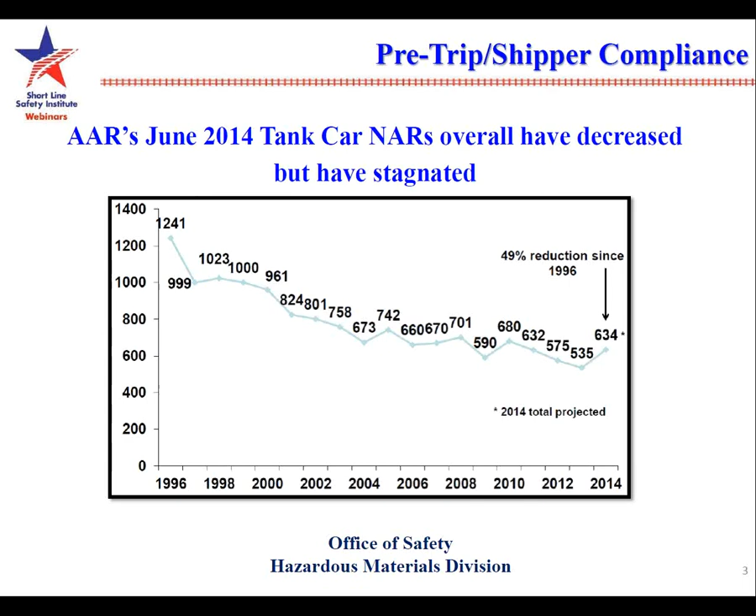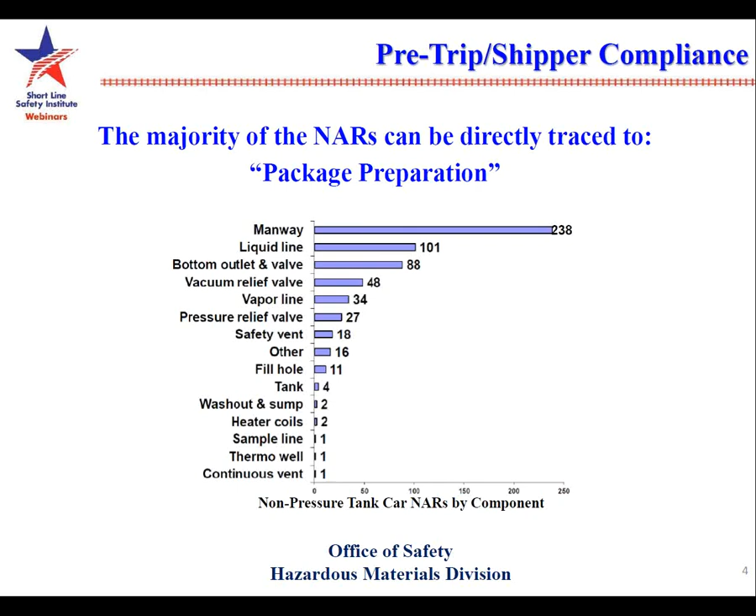Around the Manway area, in the causes, 120 of those causes at the Manway were loose bolts, 60 were gasket deterioration, 25 gaskets missing, 19 gaskets misaligned, 3 gaskets the wrong size, and 3 had new breaks in the eye bolts connecting the Manway cover to the nozzle.

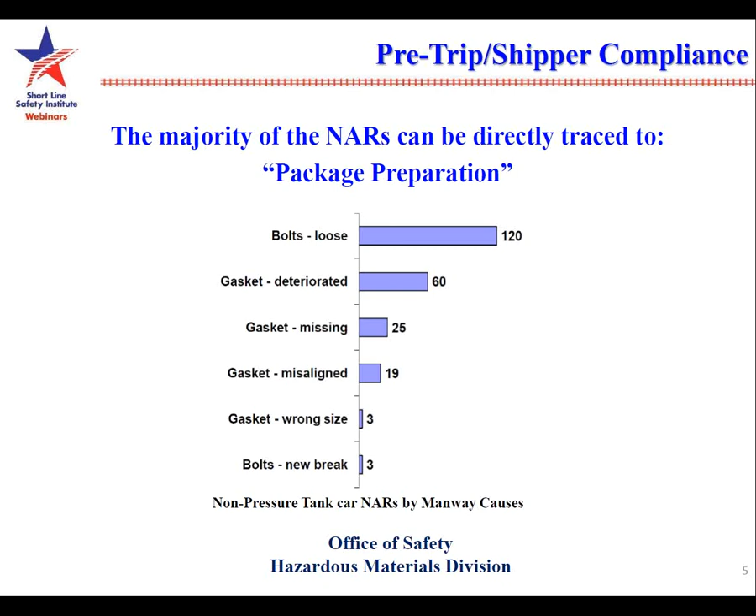Our approach to reducing these NARs is going into the shippers with our inspectors, looking at 3 different areas that directly affect package preparation and reducing NARs.

First of all, it's function-specific training. All shippers are required to provide training to all their employees preparing a tank car for transportation, and they have to come up with a training program that will not allow leaks in transportation. So we look at their specific training.

We also look at their standard operating procedures, or SOPs, and their owner equipment manufacturer OEM recommendations. Now, the SOPs and OEMs are not required by regulation, although when we find that they're not following a manufacturer's recommendation and they get a leak in transportation, we're going to ask for the maximum penalty because they did not follow a guideline or industry standard that was out there to help ensure that package is secured according to the item they're using, such as a gasket.

Now finally, after reviewing those training items and their SOPs and OEMs, we go out to the loading racks where the operators are loading the cars and observe them to see if they're following their training procedures or any SOPs or OEMs.

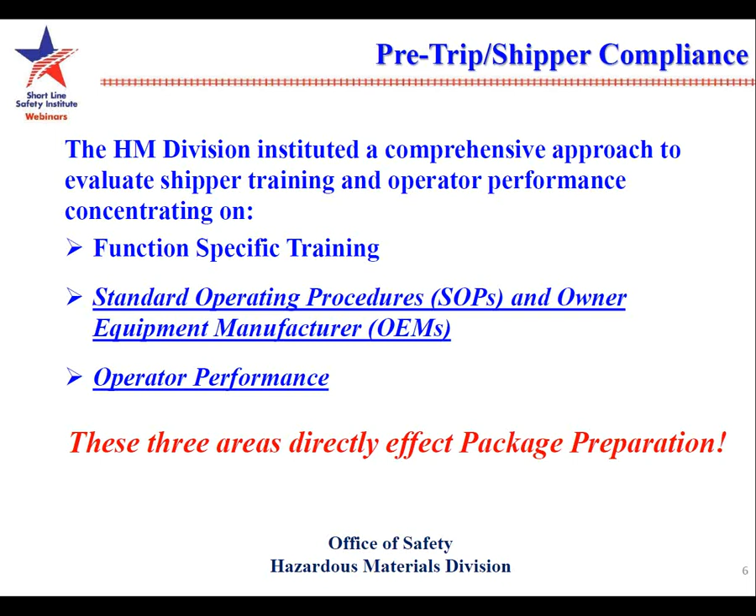So as I said, what we do is first go over the training inside the office, look at their SOPs and OEMs, and finally go out to the loading racks and watch how they prepare a tank car for transportation.

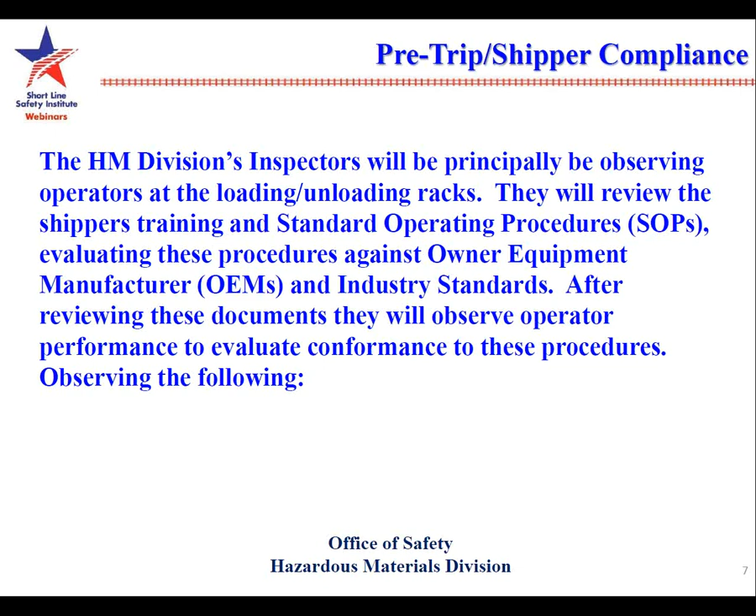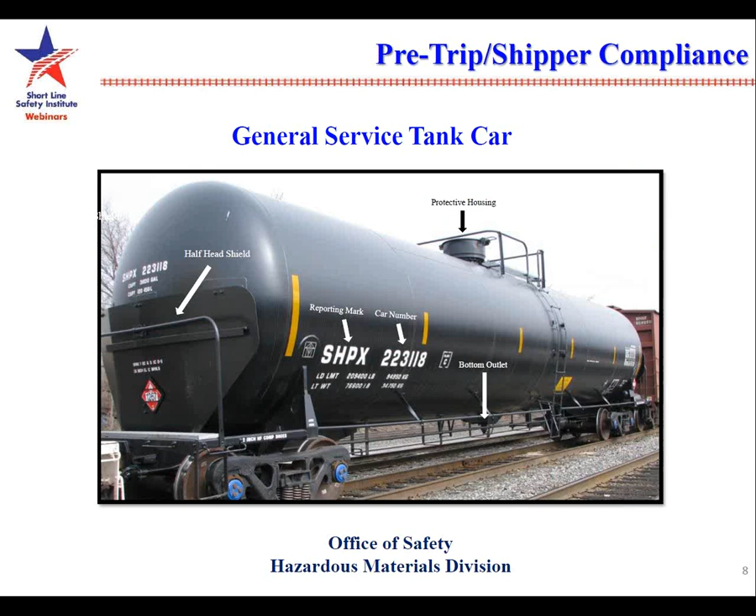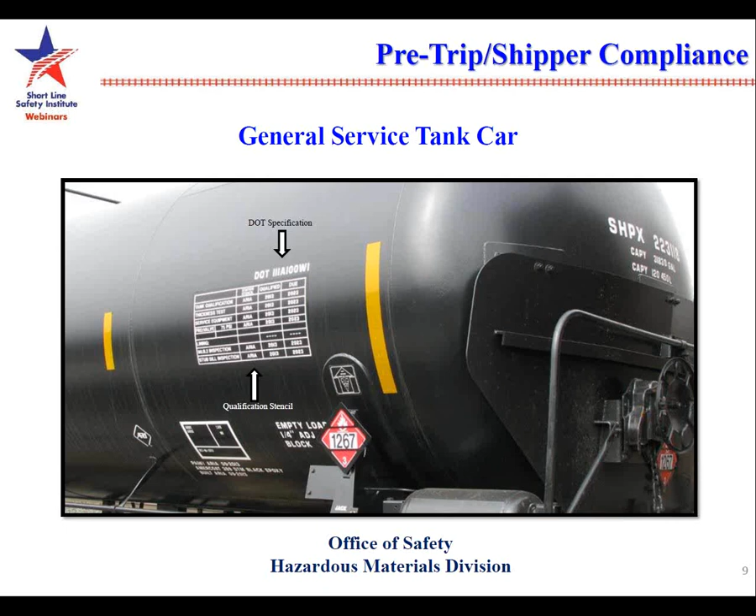The pressure relief device is designed so that if you build up too much internal pressure, rather than split a car, it'll vent the product to stop the car from bursting.

The vapor line is used when you're loading a car. As you're putting product in, you have to be able to vent the car because you're displacing the air, unless you're loading through a manway cover. But if you're loading through the service equipment, you have the vapor line and the liquid line. The liquid line, of course, is where you hook up your loading line and start loading your car.

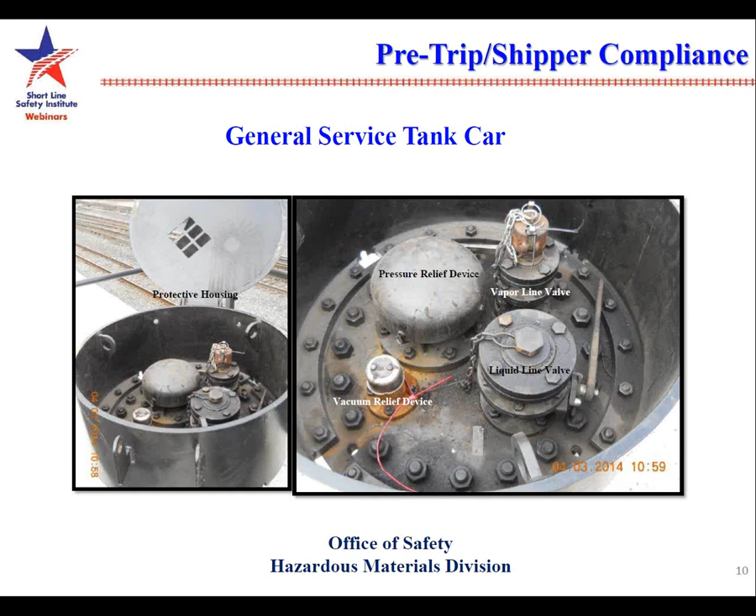The vacuum relief device is designed for the unloading side of the house. After the car is loaded, it goes to a customer for unloading. If the unloader doesn't open a vapor line valve to allow in air as the car is unloaded, the device is designed to suck air in to stop a car from collapsing. And they'll collapse like a tin can if you don't have air going into your car as you're unloading it.

At the bottom of the car, this is the bottom outlet valve, and at the top there you see the bottom outlet valve handle, which actuates your valve to open or close it. At the bottom of the configuration, you'll see the bottom outlet cap, which screws onto the nozzle off the valve, and at the bottom of that is a bottom outlet valve cap's plug.

These are items that are found leaking in transportation quite often. If you remember back to the earlier slide, 88% of the NARs were from the bottom outlet area. Generally, it's from the cap and a bad seal.

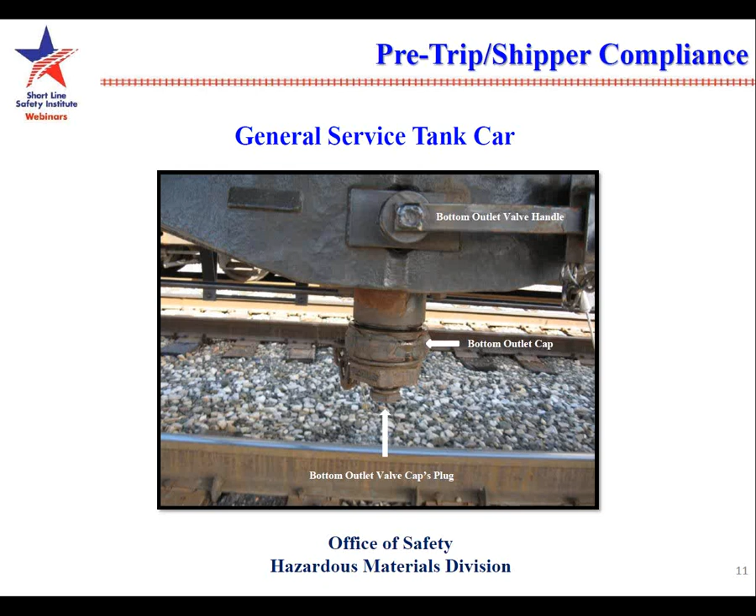Prior to loading a car at a loading rack, the shippers should be doing an inspection of the car and all the service equipment. As we identified, you look at the test dates on the service equipment, make sure it's the right car. The other items you look at are the vacuum relief valve.

Is the valve venting? Is it in proper condition? Has it been disabled? We found that people, when they think it's not working, will get duct tape, wrap it around, and prevent the valve from hissing. You're disabling the function of that car and could cause a collapse.

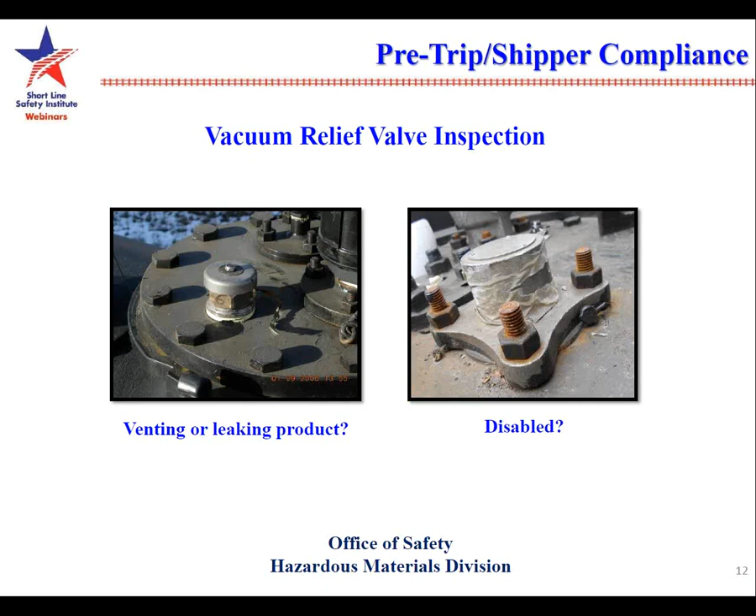The other things we're looking at are the vapor and liquid lines, to see if the caps, the plugs are tight, the valves are closed. The picture on the left here shows you the old bread box cover for the liquid and vapor lines. The loader has to look at these valves to make sure they're in operating condition before loading a car.

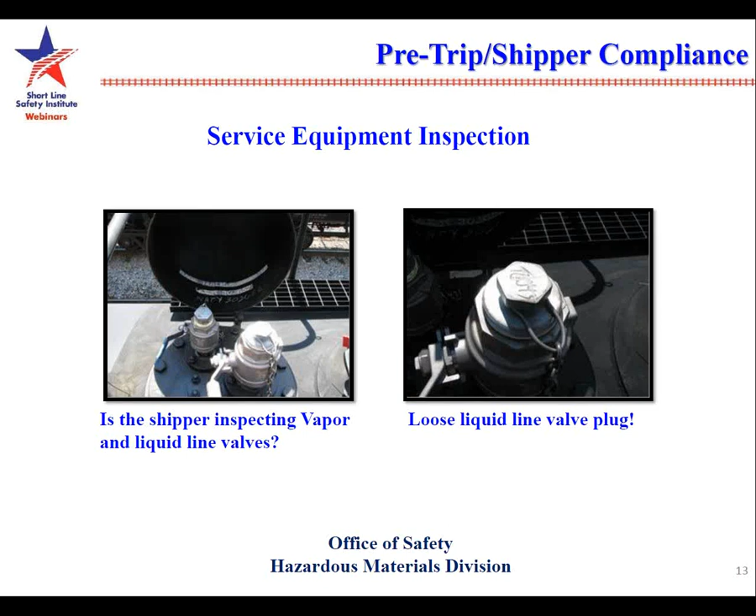Another thing they'll look at, if they're loading through the manway cover, is they'll open the cover and check the gasket. In this case, that gasket is torn. The cause for this was generally over-torquing. We'll get into that in a little bit.

Most of the time it's caused by pneumatic impact wrenches. Prior to the last 10 years, most of the industry was using pipe wrenches to torque down the swing bolts or the eye bolts on a manway cover. In the last particularly 10 years, 5 years especially, they're going to impact wrenches. It speeds up the operation, but we'll get into the problems with that in a few slides here.

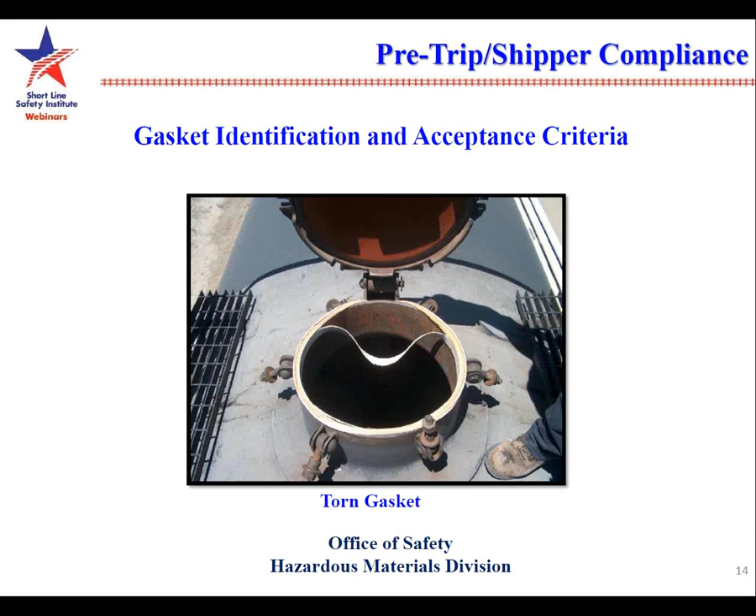One of the things they're inspecting for is that gasket. This type of gasket is sealed instead of on the nozzle of the manway, it's right in the manway cover. This is a hard gasket, and it has a compression set. On the right, you'll see that there's a little groove inside that gasket. That's not supposed to be there. It's lost its elasticity and will not give you a good seal.

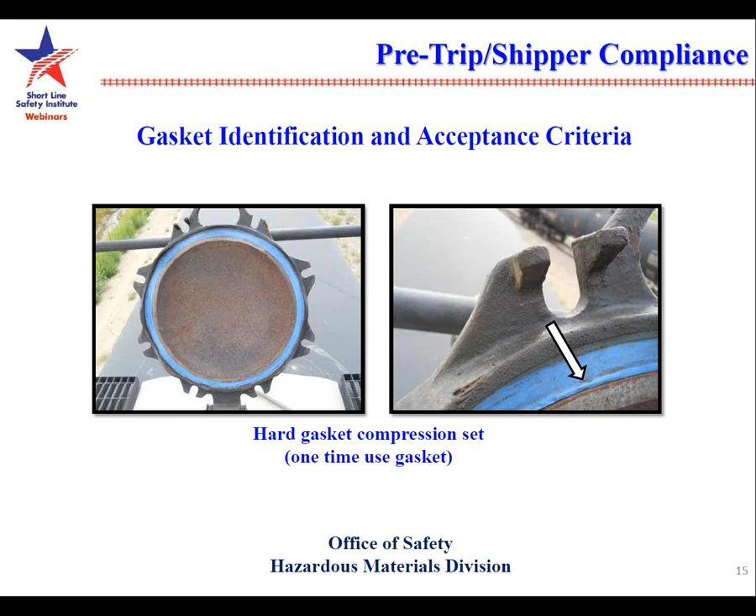If you look up the use for most gaskets, not all, but most are a one-time use gasket. In order to save money, we'll find that shippers will reuse gaskets over and over, and this is a result of reusing a gasket. You get a permanent compression set, and then when you go to torque your manway cover down, it's not going to seal.

This gasket's a rubber or elastomeric gasket. It is a multi-use gasket, but over time it will get degradation. As you can see there, it's starting to rot away, either from chemical degradation or from the age of the gasket itself.

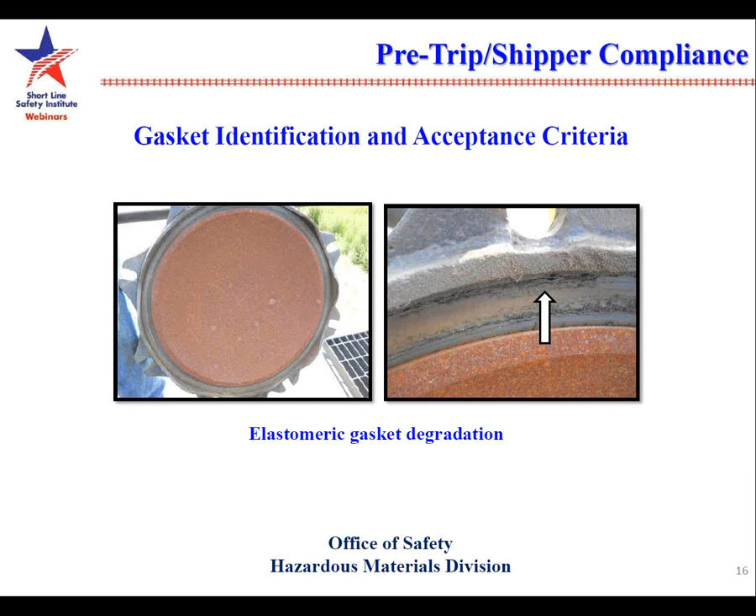Prior to loading a car, the loaders at the rack have to identify if there's any heel in the car, any commodity left at the bottom that wasn't emptied from the last shipment. This person here is taking a mechanical estimate of the heel in the car. They'll stick a rod down, come up, and know how much commodity is in the car, then figure that out for what's called an outage.

When you load a tank car, federal regulation requires anywhere from a 1 to 5% outage depending on commodity. So the heel that's in there has to be calculated into how much you put in a car, so you have that outage at the end.

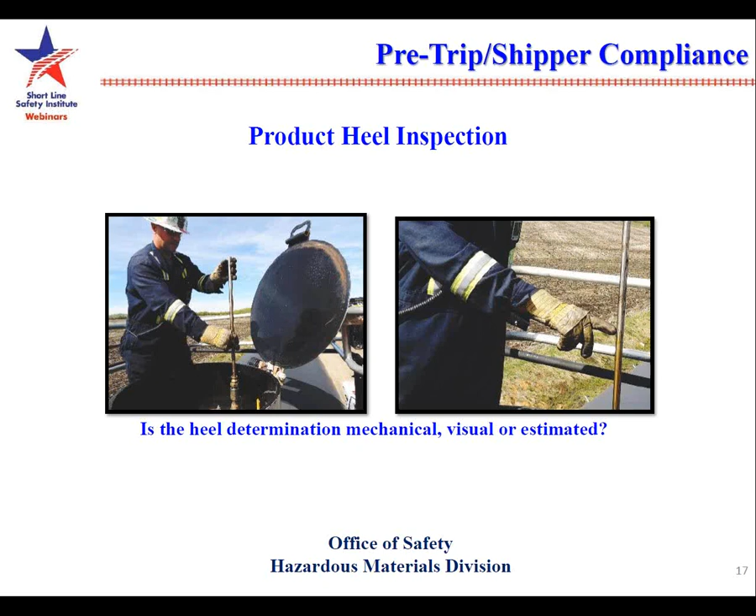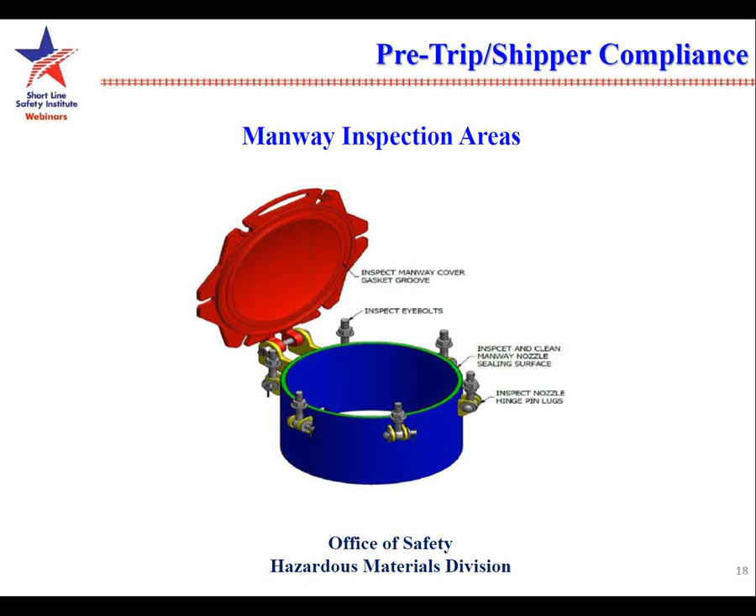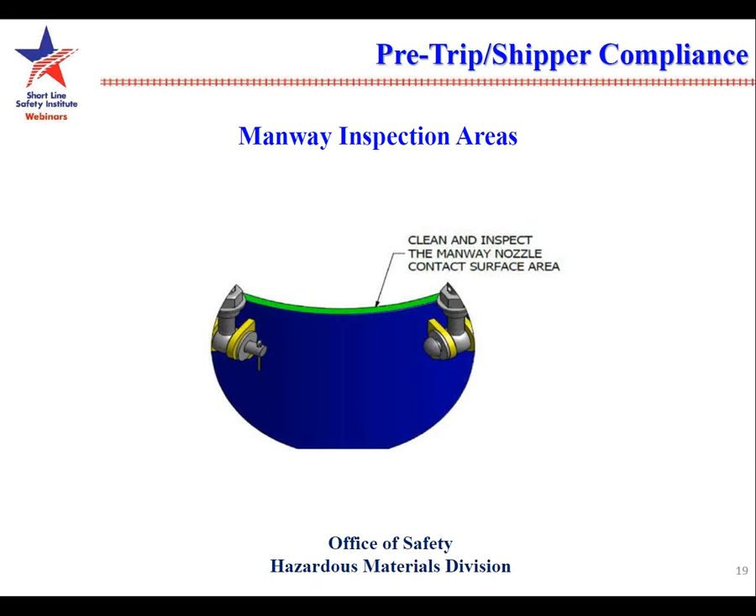Here it's showing an inspection of the manway gasket, the pipe that goes into the manway cover itself. You go around, you feel and observe it with your eyes and also your fingers, feeling around to make sure there's no compression set in it.

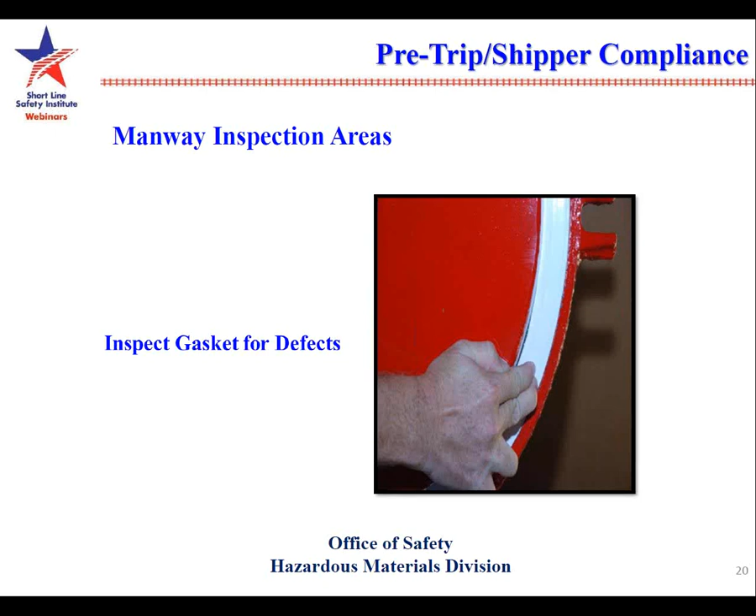Another critical part of sealing a car is your swing bolt. When you're sealing up the car, you have to make sure the swing bolt is perpendicular to the manway cover, and the eye bolts don't have any damage or wear. We'll show you some pictures of some wear. Like I said, they have to be perpendicular before fastening down.

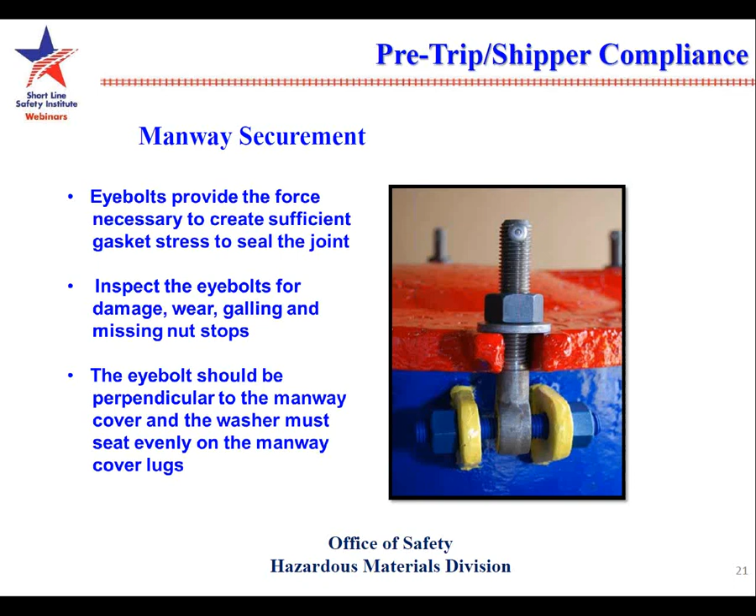Another very important and critical part of closing a car is lubrication. We find many shippers are not using lubrication, and what happens is you end up galling these swing bolts or eye bolts on the car. So not only do the threads of your swing bolts have to be lubricated, but as you see here, the face of the washer is very critical in the sealing of a manway cover.

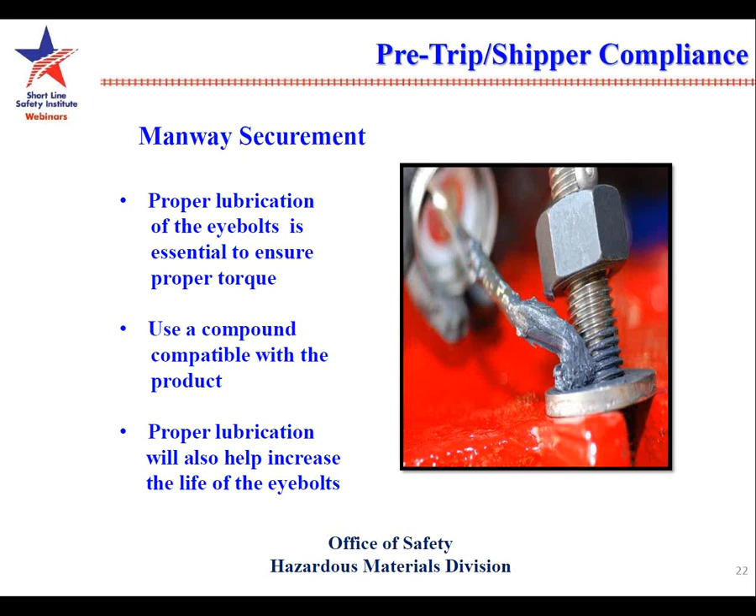Most OEMs or equipment manufacturers recommend the use of a torque wrench, so you are precise on how you're sealing your car. It's not a regulation, it's just a recommendation.

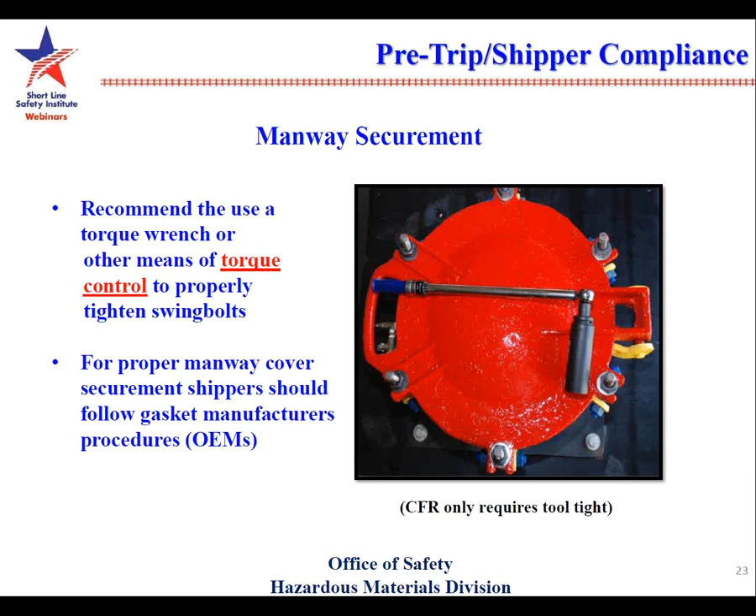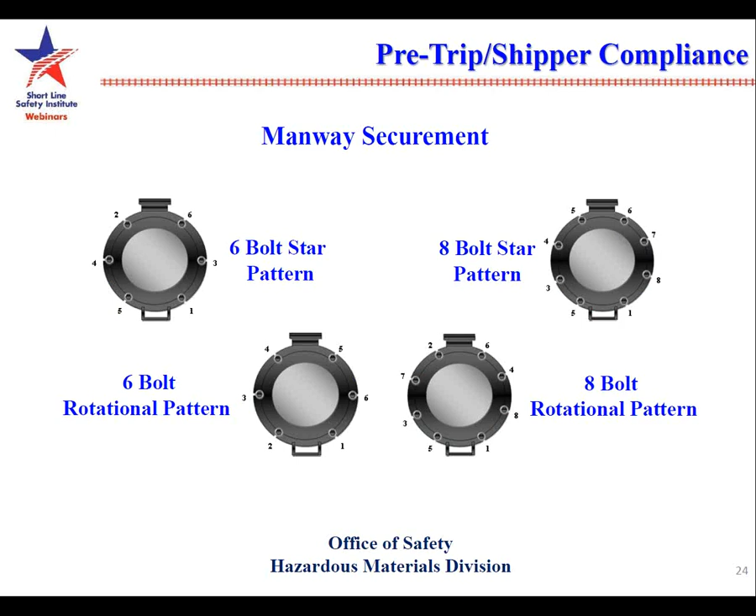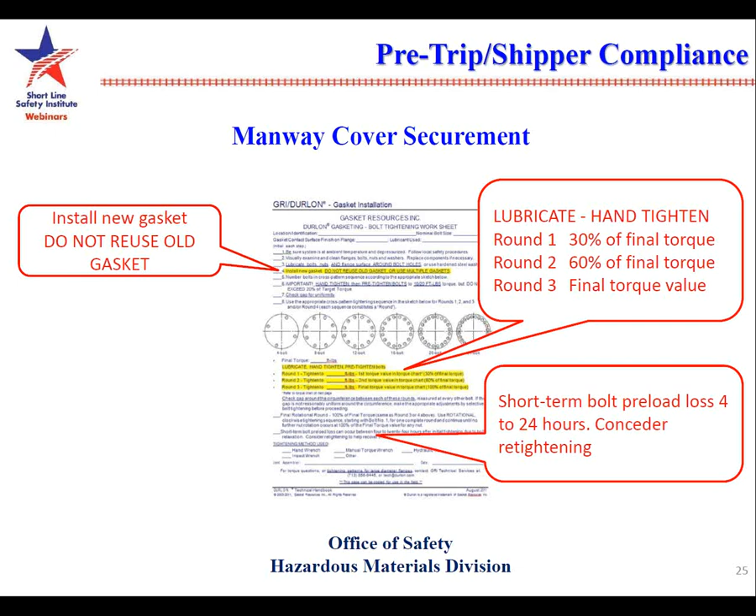Next, it shows you the lubrication we went over that's essential to sealing a manway cover, done in 3 equal increments, with 100% being the final torque. Your first round is 30%, your second round is 60%, and then your final torque at 100%. You let that sit for 24 hours. Go back and retighten it with this sequence, or you could have a leak path in your nozzle area.

These slides are looking at Manway swing bolts and the defect. What we're illustrating here, every Manway gasket, a Manway cover, has a safety eye bolt, at least one, most have two. What that's designed for: when the car is under load, it will build up pressure in transportation. And when it's going to your consignee to be unloaded, they'll loosen the swing bolts, flip them off to the side, but there's one or two safety eye bolts, and if a safety eye bolt's not in place and they loosen that, that Manway lid will fly off. Even under 5 to 10 pound pressure, it'll fly off like a rocket, and it could really hurt somebody or kill them.

So there's a safety swing bolt that has to be there. This is an illustration where that safety swing bolt is not in place.

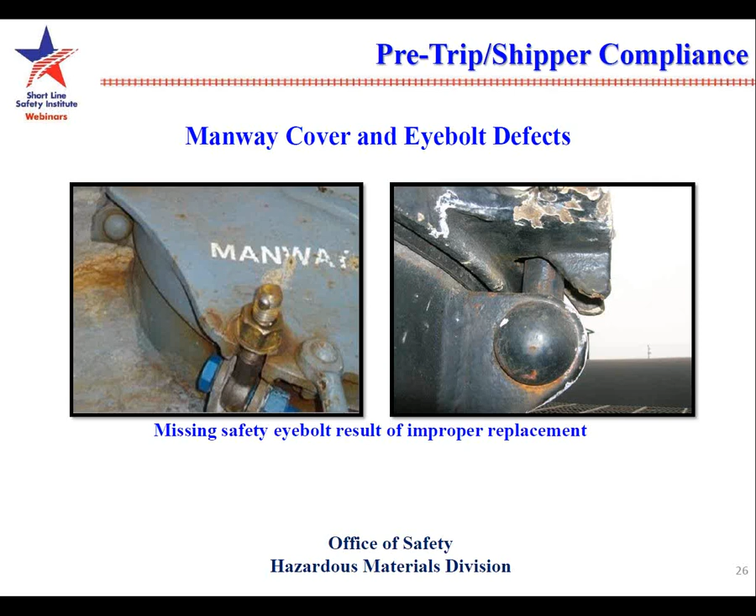This is a safety swing bolt, and you can see the little pin that goes behind the little lug that comes down on the Manway cover. Off to the right, you'll see a safety swing bolt illustrated, a new one. So when that's loosened, there's no way that swing bolt can fly out and the Manway cover come up until that pressure is relieved.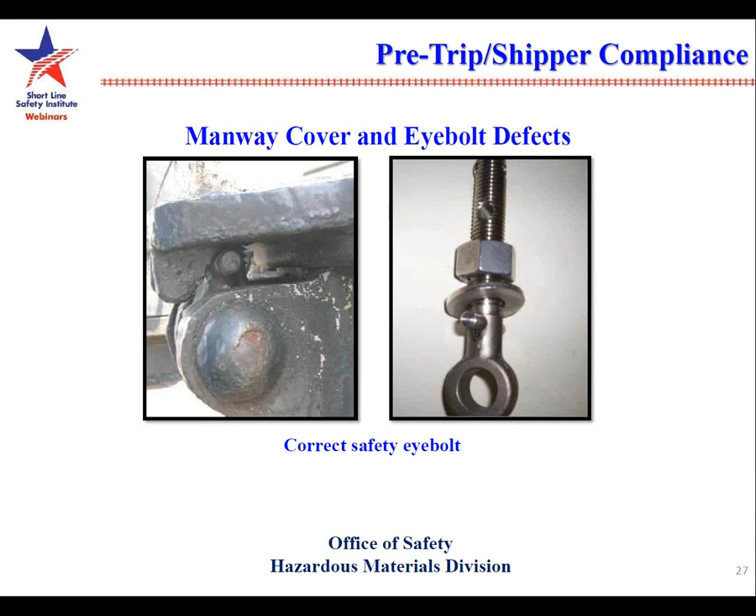If you don't lubricate, and particularly with the use of pneumatic impact wrenches, it heats the metal an awful lot in transportation. Prior to using impact wrenches, you didn't see this as much. 15 to 20 years ago, you didn't have a lot of this. Now we're seeing a tremendous amount of galled bolts.

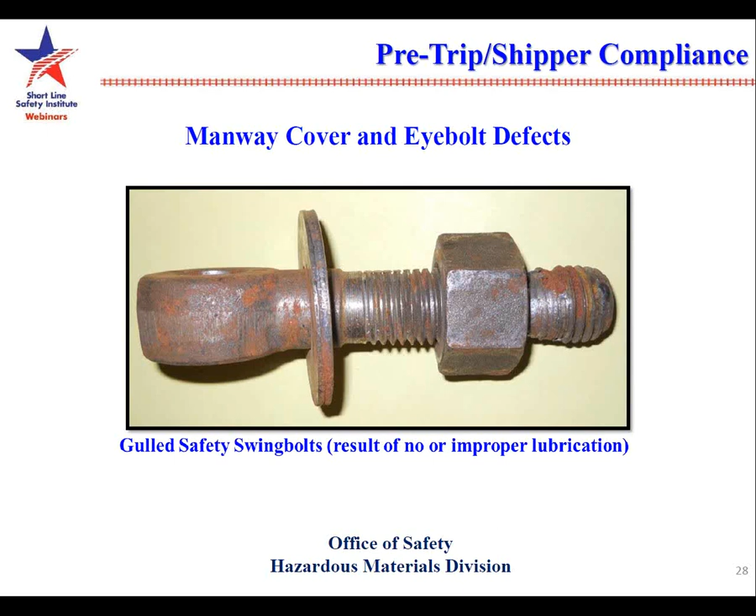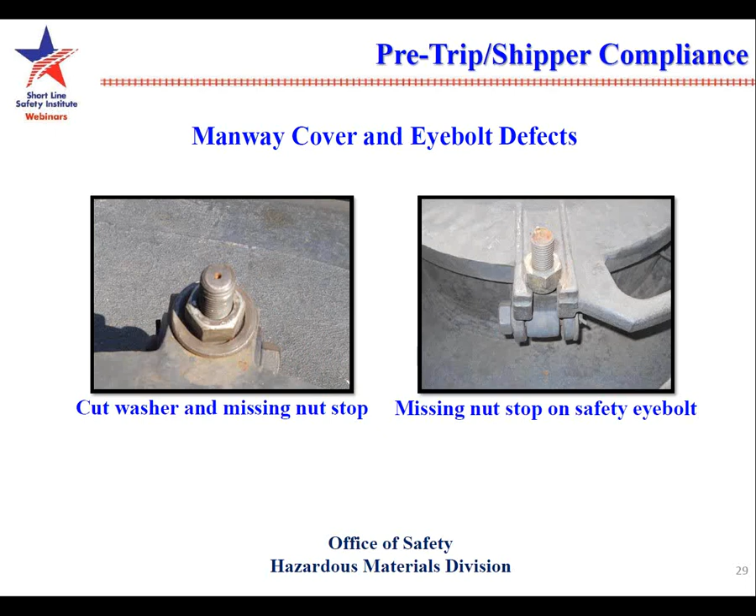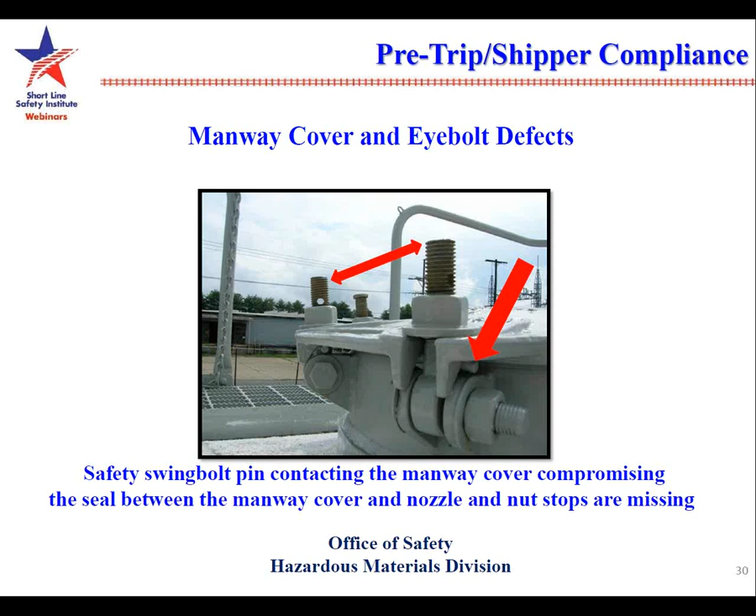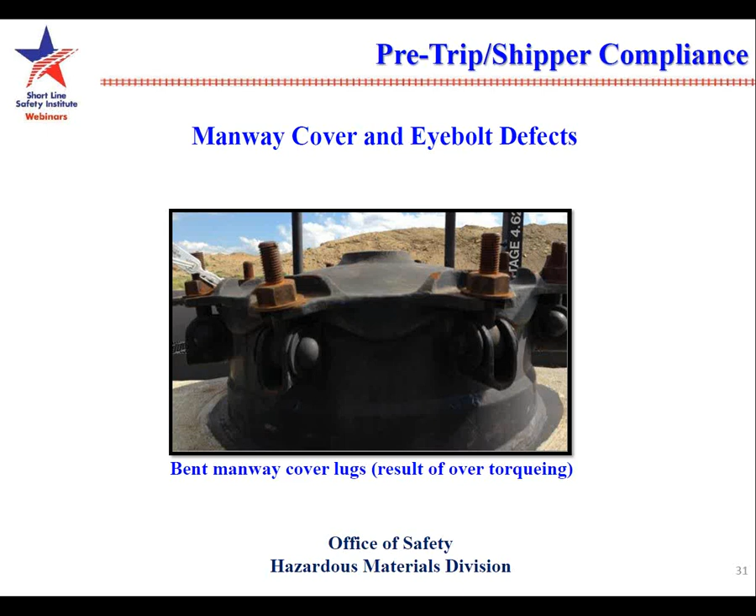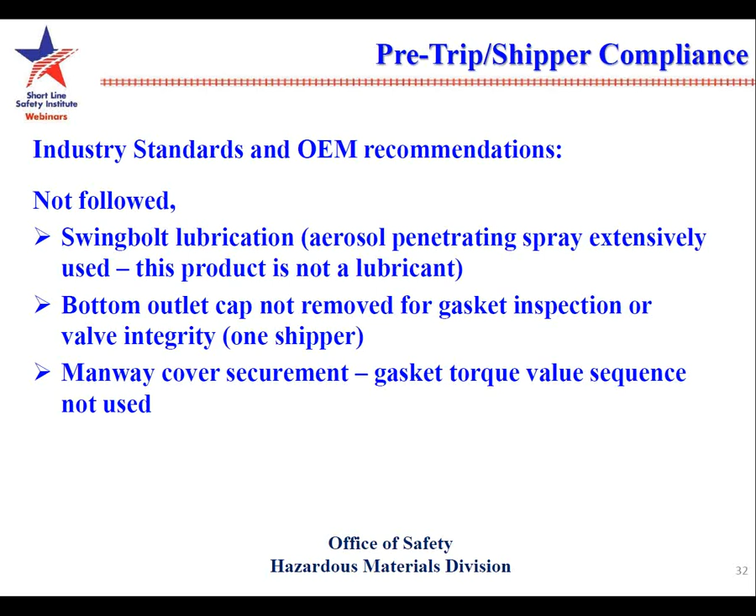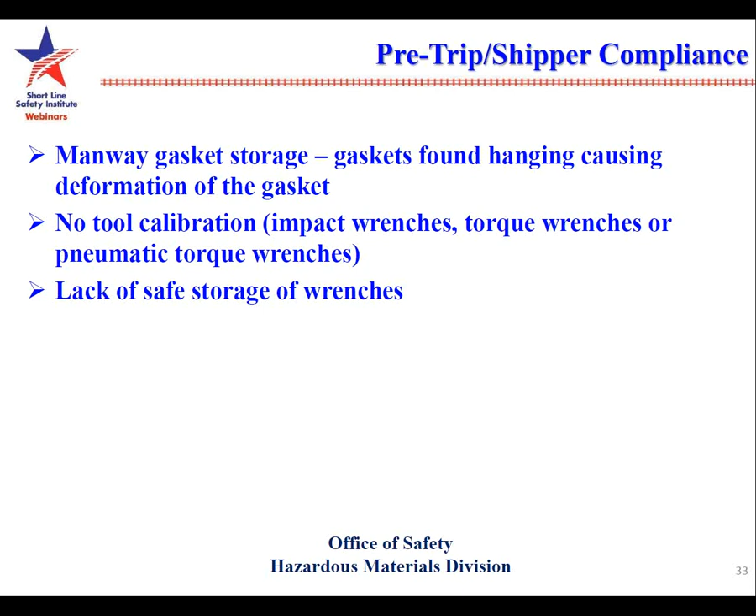Another thing is lack of safe storage of the torque wrenches. Some people just lean them against a post or something. They could fall off the rack and get out of calibration.

Other critical observations we found: manway cover gasket reuse. As I showed you in one of the illustrations prior to this, most gasket manufacturers only recommend one use for a hard gasket, no reuse of that gasket. Now there are better hard gaskets that are designed for reuse, but of course they're a lot more expensive and shippers tend to stay away from them. So we let the shippers know that these are one-use gaskets. We can't tell them not to use it, but there is a chance that the gasket could leak in transportation.

What we do tell them, if they do have a leak in transportation and are not following a gasket manufacturer's recommendations, we are going to ask for the maximum penalty, because they willingly knew - once we tell them that there is a procedure or a recommendation and they're not following it, they decided not to follow that - so we're going to elevate the penalty amount.

We're swinging over to swing bolt washer lubrication, very important. Torque value sequence, which is the star pattern. And a big one is the 24-hour retightening of the manway cover swing bolts. We probably have less than 1% of the manufacturers retorquing, or checking the retorques, or retorquing after 24 hours. We're in a production era.

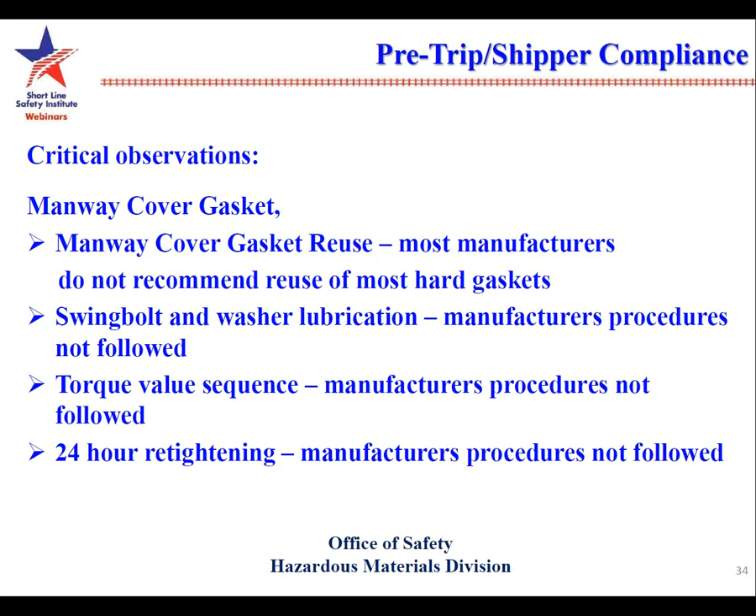Wrenches. A 3/4 inch impact wrench develops anywhere between... now, a hard gasket requires at max 200 to 250 foot-pounds. Well, with a 3/4 inch impact wrench, your first shot on it, you've already exceeded that maximum torque value. And that should be acquired in 3 equal steps. In the 1/2 inch, you're a little closer, but still sealing at 700 is going to destroy a gasket. In the elastomeric or rubber gasket, the recommendations are generally between 80 and 110 foot-pounds. So you'll cut a gasket, you'll kill it real quick.

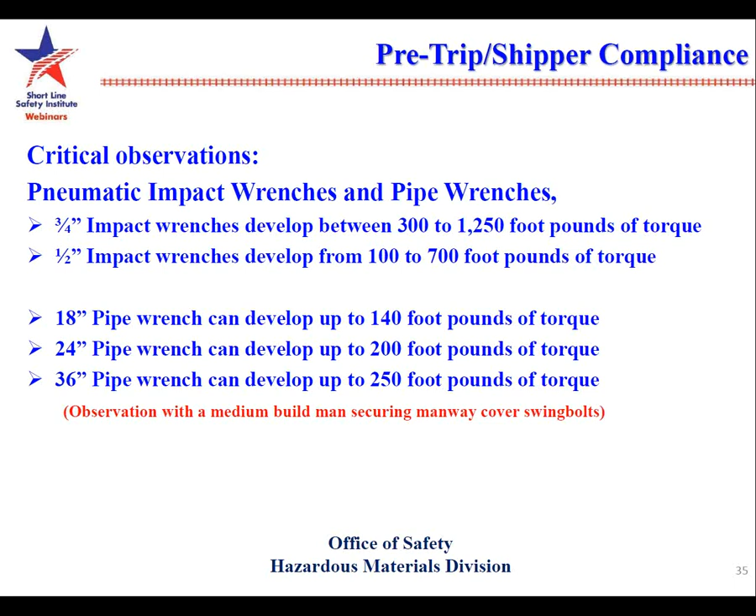And for the people still using pipe wrenches, we did a study with Union Tank Car. We took an 18, 24, and 36-inch pipe wrench with a medium-built person, and we had them tighten the manway cover in the proper sequence, and then we went back with a torque wrench to see what setting it was. What we found is that an 18-inch pipe wrench will develop up to 140 foot-pounds. Well, if you go back to an elastomeric gasket at a maximum of 110 foot-pounds, we've already exceeded it and probably have pinched or cut that gasket. A 24-inch pipe wrench will develop up to 200 foot-pounds, which is probably ideal for a hard gasket. And a 36-inch pipe wrench will get you up to 250 foot-pounds.

And this again, I just told you about the elastomeric and the hard gasket. The elastomeric maximum is between 80 and 110 foot-pounds. The hard gasket anywhere between 200 and 250 foot-pounds, depending on the manufacturer.